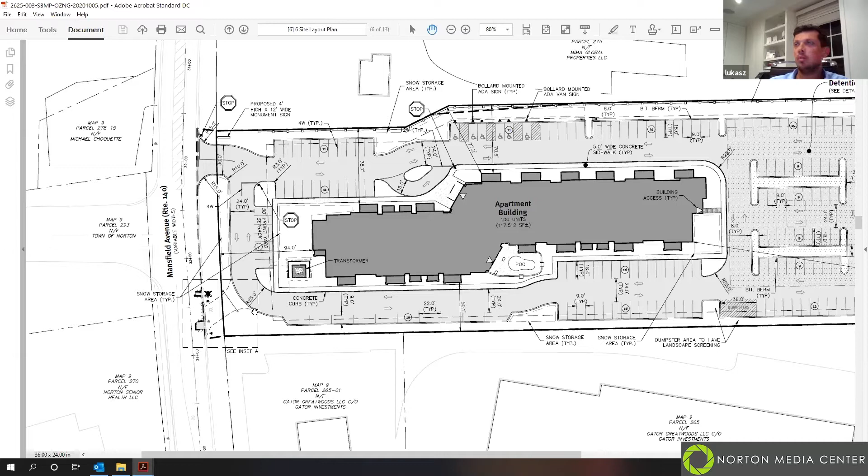That's why we started talking about the sidewalk, because we all came to the agreement that someone from here is going to go into the shopping complex, and to have them walk on the side of a road that has no sidewalk. Yeah, so the sidewalk's across the street right now.

It's even shown on Google Maps. That sidewalk goes across the entire property of the senior center, essentially, but then it randomly stops right in front of Great Woods, somewhere across from McDonald's.

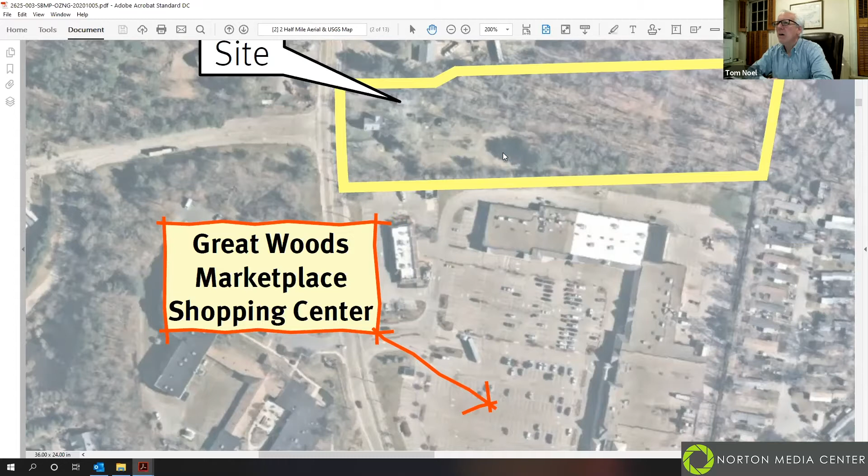From a common sense perspective, if Mass DOT got involved at any level, they would probably want to continue the sidewalk on that one side of the street and not have people jumping across the street. It's in our interest to request what we think is appropriate. I note the other apartments just to the north of the oil delivery company, too, and those people will use the street to get to Great Woods Marketplace.

So I think I understand what you're saying - that may be a reason DOT says hold on, let's plan this. I'm not saying no to the sidewalk. What I'm saying is, if we go down this path, which isn't a bad idea, there is a sidewalk across the street, so we should consider possibly a crosswalk so people can cross the street if they need to.

Yeah, I'm not disagreeing. That's exclusively DOT's call though, isn't it? Correct, yeah, that's a DOT street, so we'd have to discuss it with them.

They'll probably look at factors including the amount of traffic, because this is what they call a mid-block crossing. So they're going to look at a number of variables before they'd approve a crosswalk. They might look at several things - they could look at the main entryway at Great Woods and have a crosswalk there potentially.

We would love, as a town, to see a red light there. We don't have one. I do want to point out, to answer the question that was raised, there are no plans - this would fall under the state's transportation improvement program. We don't have any plans for this area to have sidewalks. So the significance is, even if we worked on it today, we'd be looking at 5-6 years out at best to get something in this area.

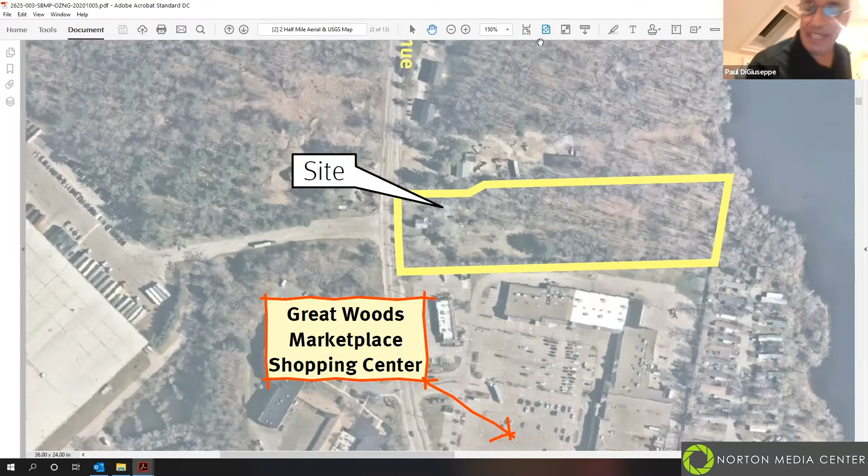Is it a crosswalk to the point of their property, or to the sidewalk? That's always a challenge, but I'm not sure what people in their project would be crossing for. You could make the connection between their project and the shopping center. But what's across the street that they would be crossing for?

That's a trickier one. But I'm saying the responsibility isn't up to the applicant to lobby the state for a crosswalk there. Right, no, that's our responsibility.

I think it's a good idea, but I don't know where it would be best located. The challenge again is you're putting people across the street where there's largely no sidewalks to begin with. So I think we stick to what we said - sidewalk in front of the applicant's property, except for the entrances, which has to be engineered, and not condition the permit itself on Department of Transportation approval.

But it's good that the applicant is agreeing to go forward and try to plan that out, include that. Does anybody else have anything on the sidewalk issue?

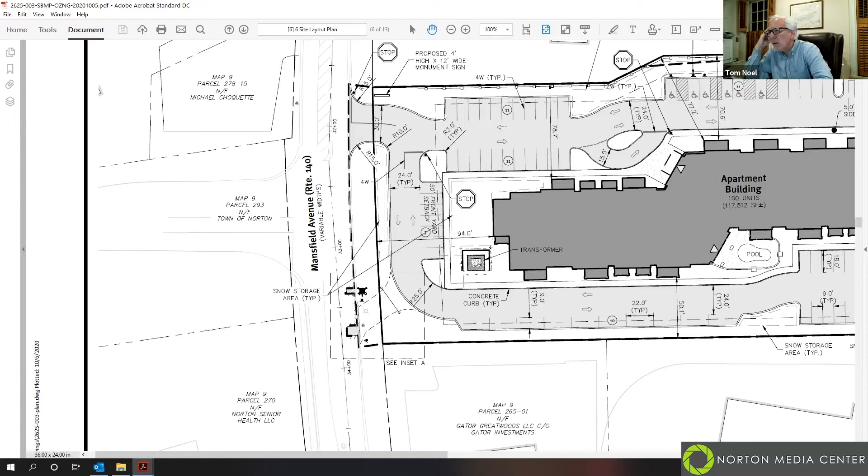Okay, so I had another question on this plan sheet. There was a note about vertical monuments on the north boundary. Am I reading that to say that some of the old property markers are on this side of the fence, for lack of a better way to put it?

Yeah, I think the peer reviewer brought this up, and we had actually noticed it when we did our survey. We went back out another time to redo this side, but you can see the monumentation on this northern property line.

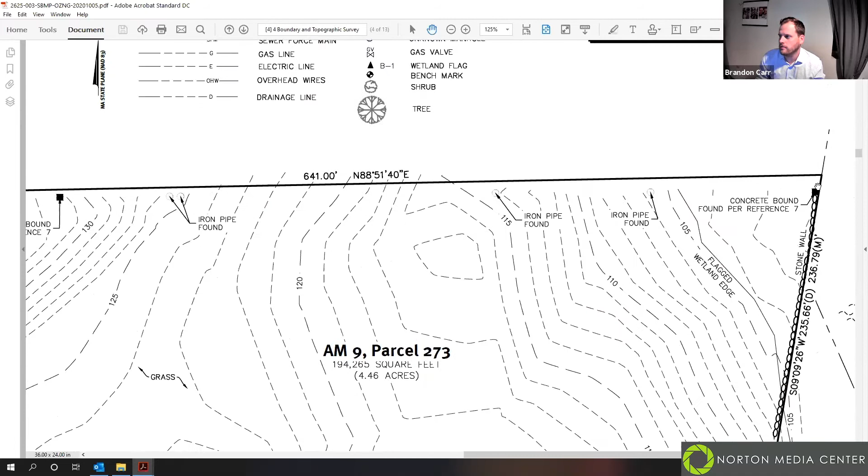We assume this wasn't correctly installed, and it looks like there were maybe a couple different versions of it. We ran the boundary from plans of record and retraced all the surveys we had, and it seemed like the monumentation on this side was just inaccurate. I had the same conversation with our surveyor when they finished the property boundary survey, and we went out and rechecked it.

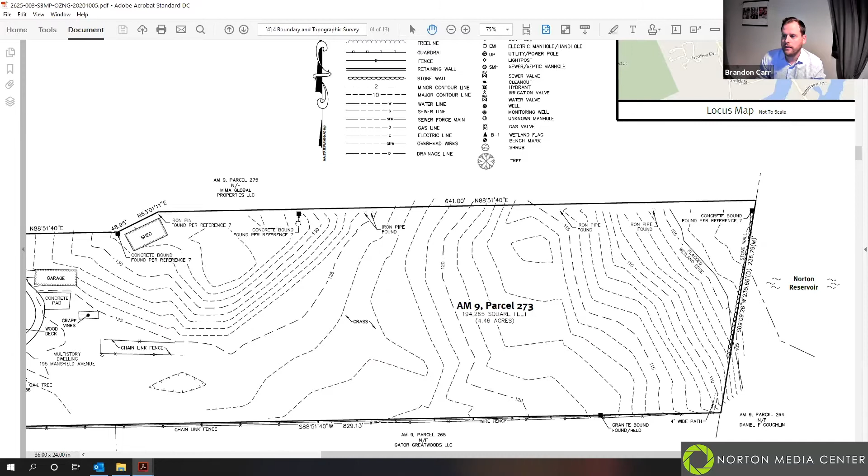So is there a marker there now so the neighbor to the north can see where you're claiming? Does the neighbor agree with your assessment? I don't know if we've had that discussion with them. It's off a couple feet, I think, in the rear here. Looking at the scale, it's probably off maybe 4 feet in the back, and closer to maybe a foot up here.

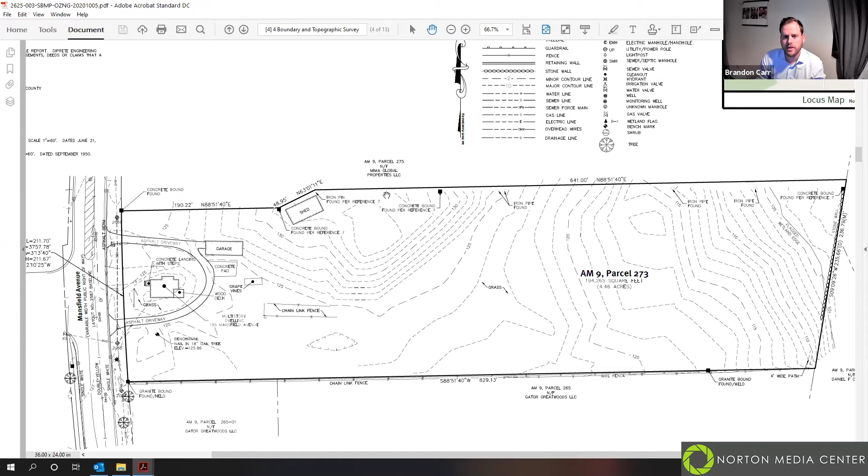So I'm just asking, is there a fence there or a ribbon now or anything? There is a fence there, and I think it's on the boundary, because I believe all this monumentation is on our side of the fence.

Well, I'm just curious as to whether the neighbor says anything different. It's not really our concern. I mean, you have to have control of the site you're presenting to us, so I'll assume that you do. I'm just curious whether he agrees. Yeah, it's an interesting little piece of the project for sure.

Were there other questions on this plan sheet specifically? There were some issues about the turning circle to the north on the north side. There's a little island there, and one question was whether you should get rid of the island. But the answer was that you're trying to make it an alternate drop-off or move-in site, which seems to make sense.

I saw that, unless our consultant or any of the members have questions on that. The other feature was the fire department got back to us, I think last Wednesday by email, saying they were fine with the revised plans. There's also a plan in the packet showing the largest apparatus we own and how it would be positioned going into and out of the site, just showing visually that it can be done. The fire department said they were okay with this? Correct, yeah. We got the exact specifications of their largest truck and entered it into our program.

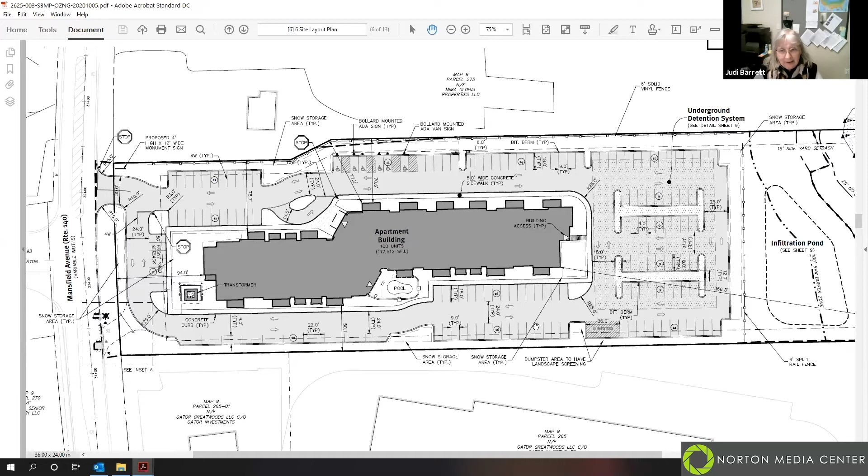I have to speak up, I agree with Paul. I do a lot of work with 40B, a lot of work with boards of appeal all over Eastern Massachusetts, and this is a higher ratio than I've seen in any other projects I'm working on, not even in transit areas, just suburbs. It's high. I think Paul is asking a legitimate question. If anybody's providing 2 spaces per unit for multifamily housing, shame on them. I'm not saying, it's nuts, sorry. Which is a good assessment of our zoning bylaw in a microcosm. But this is 1.58, right? Yeah, 1.58.

Well, my only commentary, if I may, Mr. Chairman, Peter Freeman speaking, is simply that AR does have a lot of experience, and to the points being made by Paul and Judy, at some point, when the developer has the vast experience that this particular developer does, and albeit there is Great Woods next door, it's still a site where you don't want to lower it like you could in a city or a suburb like Brookline, a very poster child near the subway and near lots of bus lines and things like that.

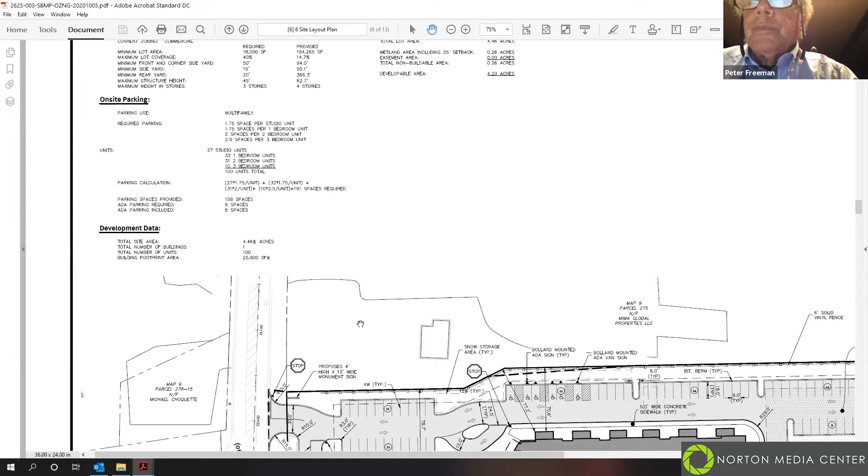So my point is not that your point is not sometimes well taken on a specific site, but here, with the experience of the developer, I'm uncomfortable having a requirement that doesn't jibe with their direct experience. Just to be clear, Peter, I'm not talking about Brookline. I know you're talking about other suburban sites, but I also handle many 40Bs, and my experience is not the same as yours with my clients. It's much more in keeping with the range that Brandon just described.

Judy, do you have a suggested ratio for a town like Norton and a spot like this? In the past, we've always been concerned that not enough parking was provided for projects like this, and we've said we don't want people wandering off site to leave their cars for a day or two. But what ratio do you recommend, Judy?

Given the location, the proximity to goods and services next door, I would probably say 1.4 maybe is what I'm used to. 1.3 to 1.4 is kind of what I'm used to seeing.

Wow, I'm surprised. I'm not, and I'm not designing their project, so I don't want to be difficult. I respect the fact that the applicant developed housing, but I am seeing these ratios come down everywhere. This is a big concern to planners - the amount of parking that we're building that ends up sitting vacant and simply creates environmental problems that are avoidable if we just didn't build so much parking.

Yeah, and Chair, just to add to Judy, typically the problem is not underparked for new projects in the last 30 years - they're most frequently overparked. They try to balance, like if it's a retail project, they'll try to balance that peak time, like day after Thanksgiving. But then you see the shopping malls around other times and they're half full, right? So that's typical of residential as well.

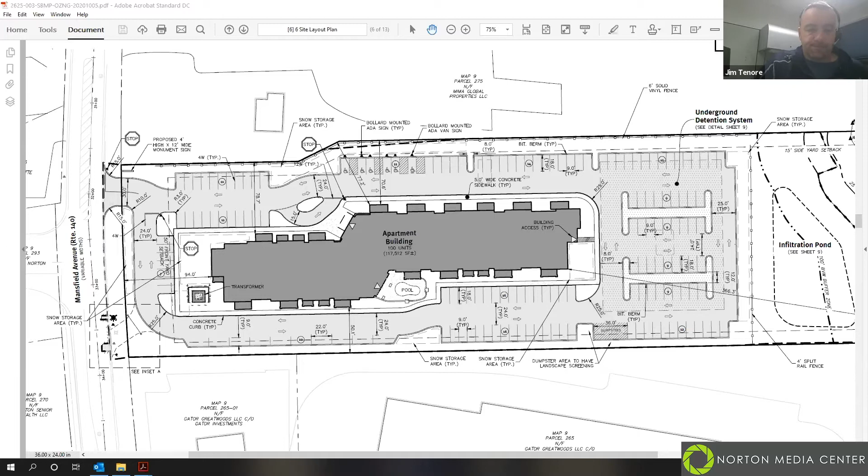But, just eyeballing this, if we were to take 18 spaces, I'm looking at the easterly end, by the infiltration pond. You could take 3 spaces, 3 spaces, 3 spaces - 1, 2, 3, 4, 5, 6 right there. You'd shave off 3 spaces off the right of all of those rows, or the 2 spaces in the outer rows, and then some combination.

So it is a savings potentially of, I don't know how much area that is impervious surface. If you want to do it, request it, or if not 18, 15 or 14.

It's up to us. What about the possibility of not building all of the parking right away? I've seen that on a lot of projects where there's this concept of reserve parking. So if you don't need it, you don't build it. If you need it, after a year, if it looks like the demand is such, then you could build the spaces you didn't build right away. Isn't that what we're talking about, or is that different?

Yeah, I was just going to add, Jason Kambitsis with AR Building, he keeps popping in and off. He was texting me, he's having some connectivity issues. So that's what we were just talking about. He just wanted to say that from their standpoint, they're not looking to build a lot of parking. It costs them more money to build, it costs them more money to maintain it.

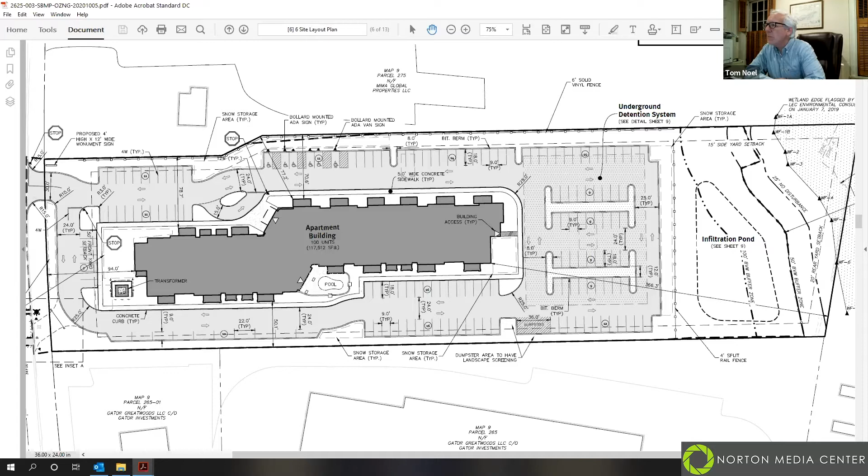Okay, Pat Brennan, do you have any view on this, contrary to leaving it as is, except demarcating certain spaces, shall be left as lawn or green space, but shall be allowed at the option of the builder? I don't know how we would word that, but I'm sure we can find out with Peter and town counsel's help.

Yeah, and I think when Brandon was pointing it out, I think the optimal spaces to leave are those 18 in the middle, because then you eliminate that access drive between there too. So it's actually a nice green area for people to use if it isn't needed as parking. Exactly, it would be nice, attractive, sure.

That condition is not hard to write, Tom, because there's actually a lot of bylaws I've worked with over time that provide for reserve parking. So there's some language we can craft around that.

Okay, well thank you. Then let's, can we move forward on that basis? Take 18, unless there's a reason not to do the middle 18 there that we're all looking at. I think this makes the most sense, these 18 right here, because exactly like Pat was saying, get rid of that. On the next plan revision, just show it, and on the detail or on the key, say that these spaces shall be kept green at the initial stage or something like that. Just make it work, and great.

We can—if you put it on the plan, that'll be like a reserve parking. Exactly. But then does the applicant owner then later have to come back to notify us?

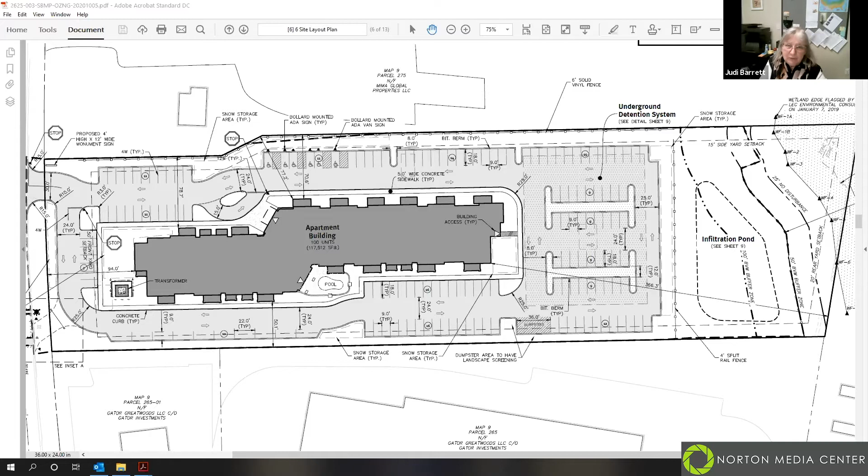No, because the way we would write the condition—I defer to you on this, Paul—but the way I've typically written this, it's reserved parking, and within a year, if the demand for the spaces actually exists, then the building inspector can authorize the construction of the parking. But you've basically already approved it because you've approved the plan, you're just marking that area as not to be built within the first 12 months or so. And Chris Carmichael is always going to be involved whenever there's a change.

So Yeah, right, okay, that sounds good. If everybody's okay with that, let's move forward on that. Thank you. You're welcome. Where do we go next, Peter?

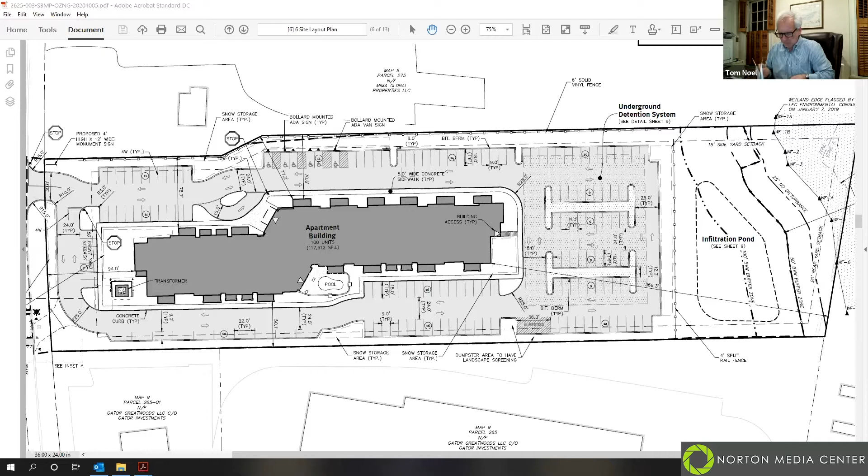With either detail by detail or a specific plan sheet, what are you comfortable with? The only other thing, deferring to Brandon, but I think we also submitted the more precise left turn lane that had been discussed, which is also something we would accept as a condition. But as with the other business, it has to be subject to the approval of MassDOT.

In other words, it's not part of the plan set, is it? No, it was a separate standalone sheet, and I think Derek from Vanasse is here if he wants to go through this.

Yeah, sure. Hi. Yeah. Hi guys, this is Derek Roach, Vanasse and Associates.

We can do everything within the existing width of the road. We just restripe—we'll stripe in a left turn lane, about a 150-foot bay, and then we'll leave the little end of the median painted there. None of this stuff is raised; this is all painted on the pavement.

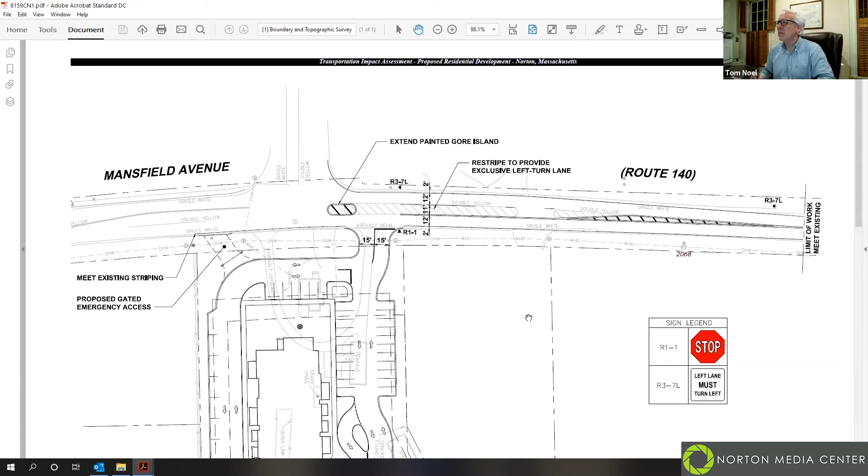And so that's pretty much it. We had just asked you to show us what it would be like and where it would be. So thank you. No problem. Any questions, Judy or members or Paul? I don't, no. And again, that's all DOT approval, right? Yes, correct.

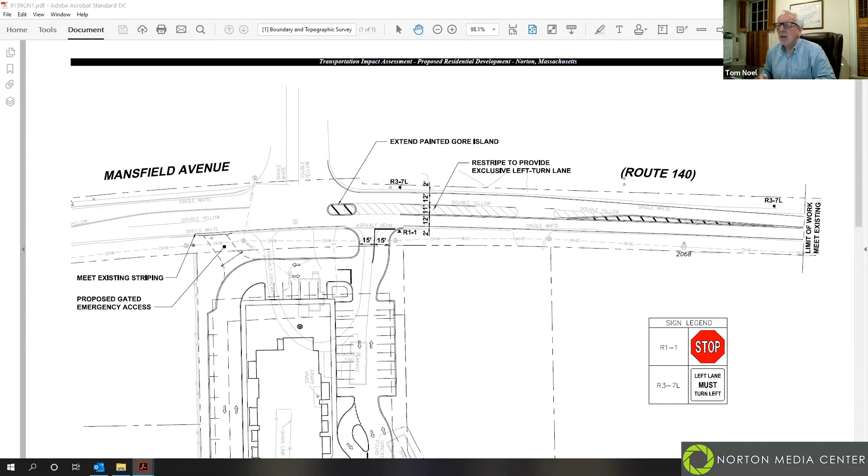One random note I had on the plan set—I think the fourth page was misnumbered. There it goes 1, 2, 3, 1, I think, instead of 4. Is that it? Yeah, sometimes with our survey plans, if they're done earlier, we plug them in and they were prepared as a 1 of 1, but we can fix that. Okay, I just wanted to note it—I didn't know if mine was messed up here that I printed out.

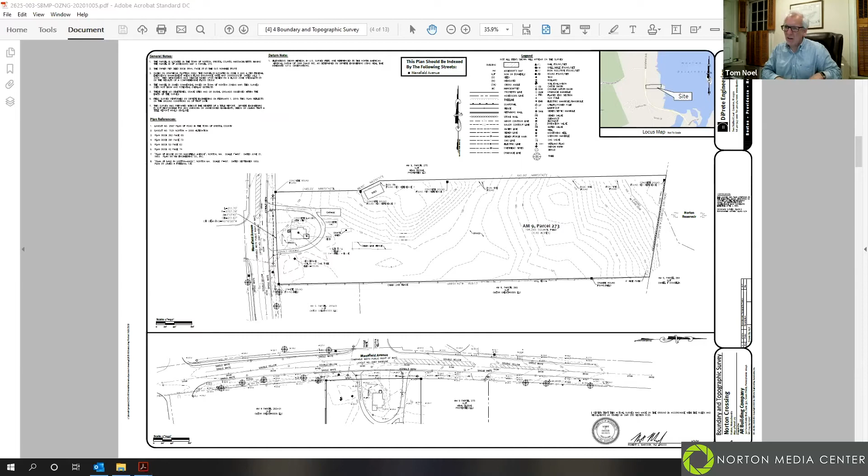Okay, there's also a photometric plan, which on my best printer doesn't show much at all—doesn't print out very well. Yeah, those don't always look great. Let me find it here and I'll put it up. Yep, it was a separate email again, I think. Right, it was. I could see it on the screen blown up, what you're doing, but it doesn't look like much on an 8.5 by 11.

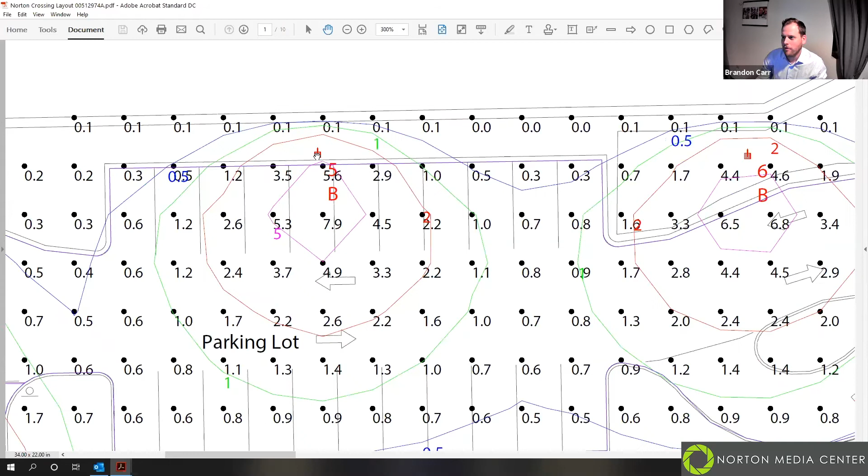There you go. So can you just tell us what we're seeing? Are the red blobs where overhead lights are going? Yes, so the circles are basically the light radiuses around the poles. The poles are tough to see, but if you really zoom in—the photometric professional field, I would say, is not great on graphical presentation, so it's tough to get a photometrics plan that looks beautiful.

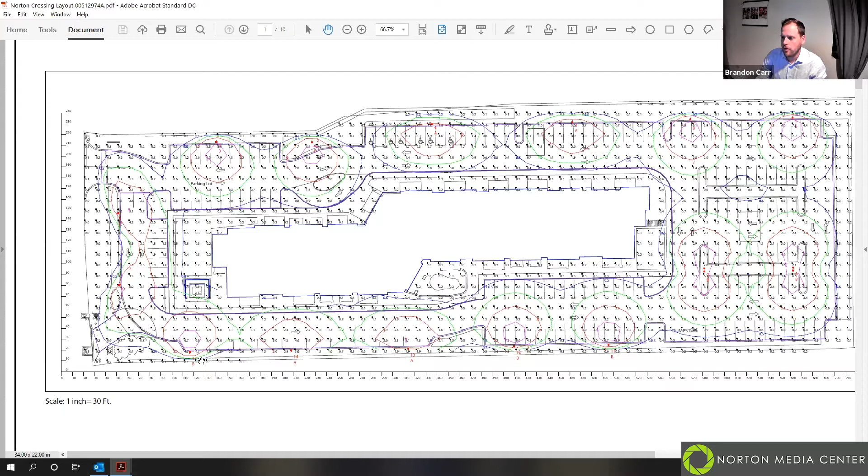So these are kind of the different intensities of light. The blue line signifies, I think, basically 0.5 foot candles, which is very, very low lighting. Usually the town regulation is 0 spillover or 0.1 spillover at the property lines. We show 0 spillover, other than in a couple spots—0.1 here, and at the entrances. Ours is 0.1. Yeah, so. Really? Yeah.

So all that you can see, there's kind of moving around the site clockwise. There's lights here, here, here along the perimeter of the development, and then a couple in the back parking area. These are double lights, these are all singles. They're all facing interior to the development, and they'll all be shielded from above and from behind.

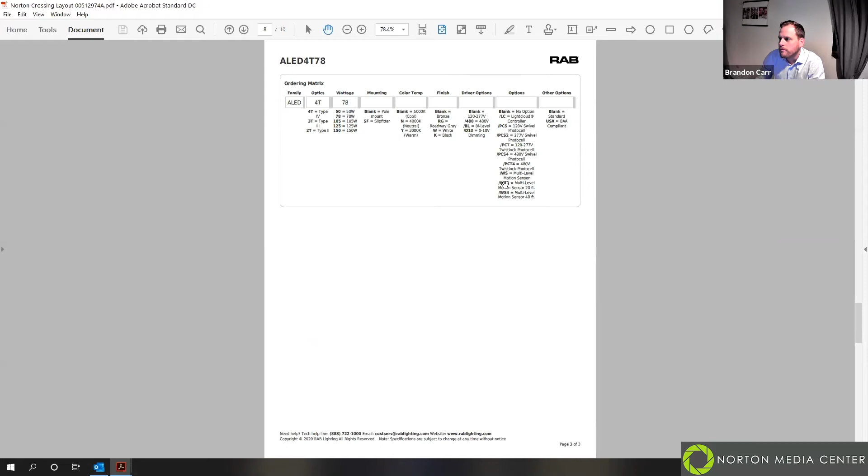I think there's some better views here. Sometimes they do a heat map kind of view, but that's kind of what you're looking at.

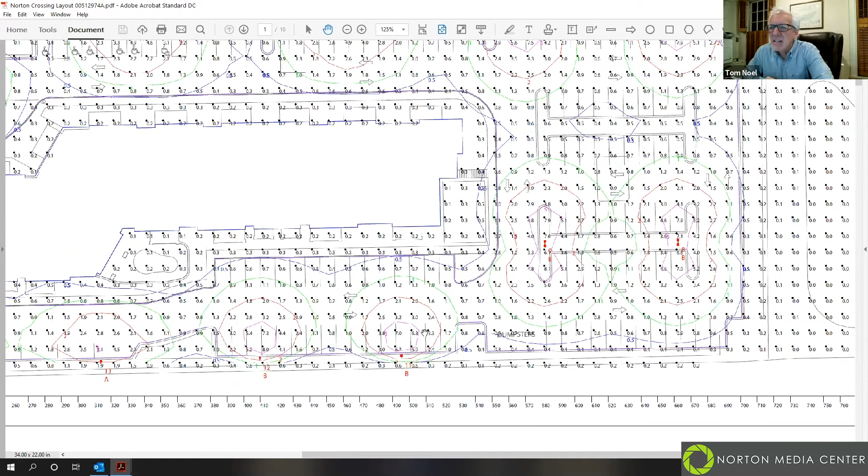Do you need a waiver for where it's 0.1 at the edge? I don't believe so. The 0.1 is the standard you don't want to exceed, so anything over 0.1 we really prefer it be reduced because of light impacts. Looking at it, we saw some 0.2s along the edge, but that still looked like it was within the property. I thought you were suggesting it exceeded at a couple points, but fine.

You could actually add screening to any of those lights and that would help with the diffraction. And on the northern property line, remind you too, we did propose a solid fence, so that would help out.

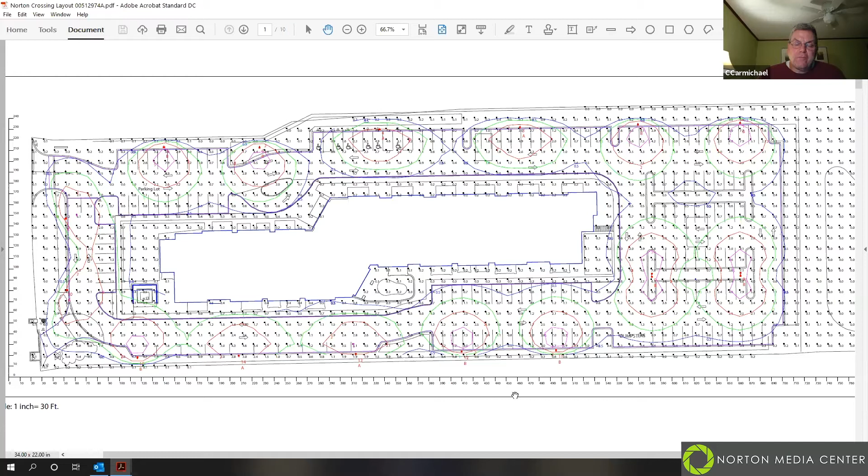That's not really modeled in here. The southern property line has an existing chain link fence. Obviously that's not going to block light, but it is a shopping center—their light probably spills over onto our site more than ours does onto theirs. These are both commercial properties to the north and to the south. It would only be to the east, where you have the mobile home park, that you might have an issue.

Like we were talking before, the 100-foot buffer—that's almost 200 feet to the property line back here where we have 0.1. And foot candle measurements, am I right—that's on the ground on a flat surface, how much light hits that spot? Is that it? Correct, yeah.

All right, thank you. Any questions on this, members? Judy? No, I'm fine. Mr. Chairman? Tom, I just had, I guess it was more of a curiosity question than anything.

In the back area where the islands are, why do we have lights in the middle of two islands, and why isn't it balanced, I guess? I can see two light poles in the back. I think two more here would have been a little overkill in the back, and that's the way they laid them out. We could maybe put one here and one here.

I think it's just that two lights—I mean these aren't big lights—I think adding two more here would kind of be overkill and really brighten up that area too much. Well, now that the center's going to be green space, you might want to look at whether you can slide or adjust those a little bit.

I guess I was just thinking, I know personally I would probably park under the lights, because it seemed unbalanced on the lighting. I would have parked close to the lights, and the other islands I wouldn't have parked under necessarily because it was darker. Well, if you have my car, you park in the dark. Yeah, but the same thing with that back corner on the Greatwood side—it would have been darker over there, so I'd assume you'd probably not park over there. Less likely.

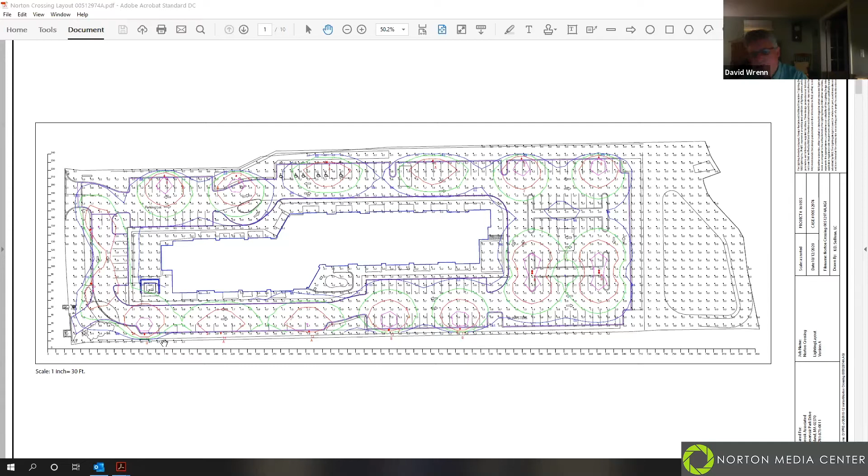I don't want to dwell on it, I just found it—I mean I don't know if this is enough light, again I don't know what the numbers mean. I'm assuming this would pass, that there's enough light there to park your car and walk safely.

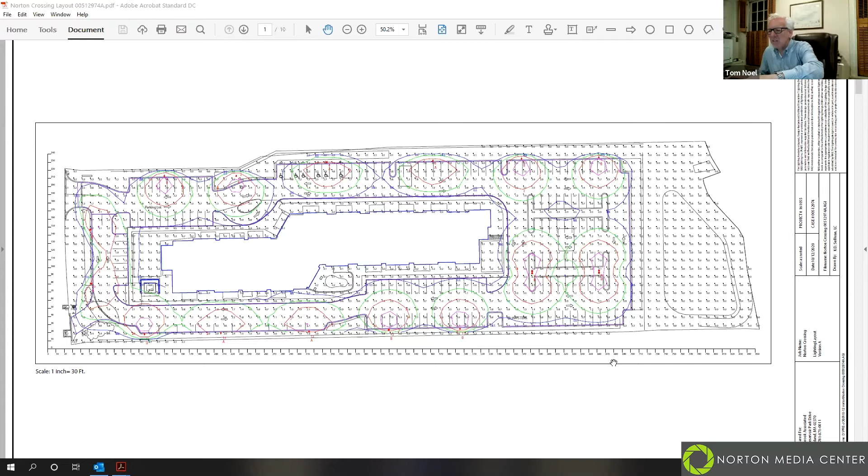This is basically when they do their lighting design—they look at the town regulations and industry standards for the different type of use. Since it is a residential use, you don't want it lit up like a shopping center or like walking around Gillette Stadium parking lots, because people are walking inside and going to bed. So it's more muted lighting, more downward-facing shielded lighting than a shopping center, especially some of the older shopping centers. You can see the light structure in that plan set you were just going through—it's kind of a flat top overhang.

Yeah, it's an LED structure. This is all screened on the top, so it's really broadcasting the light pretty much straight down. I'm assuming this will be appropriate. Yeah, this is a pretty standard light style that we see on these types of developments.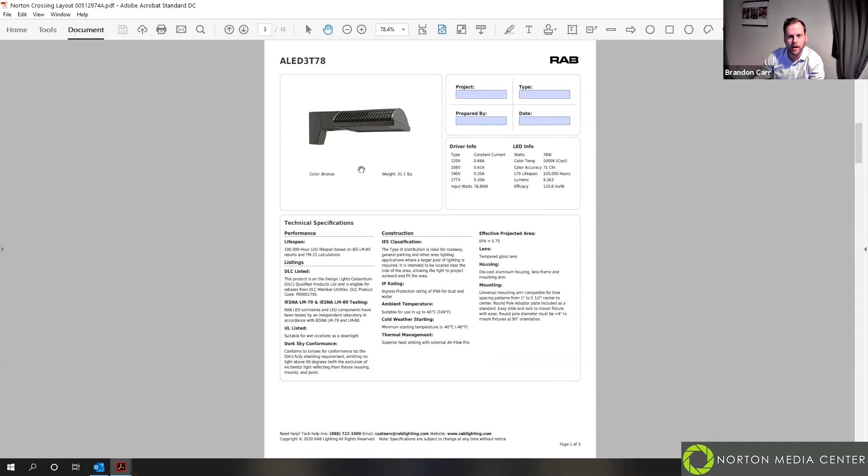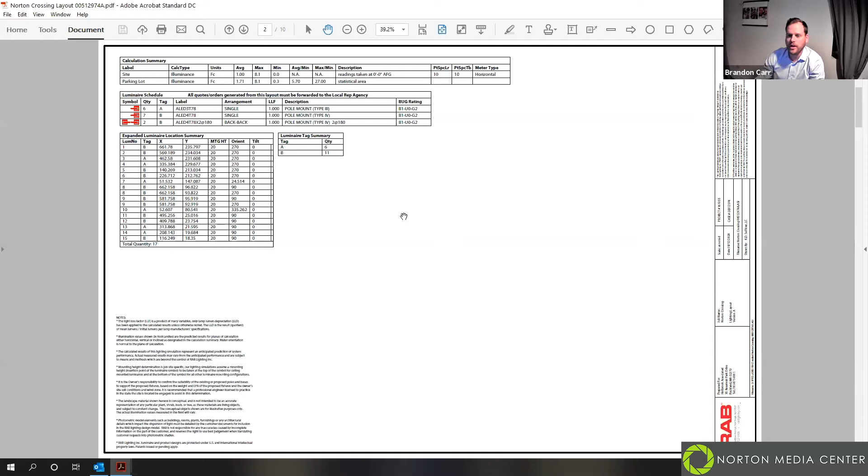Light pollution is the real concern with most developments. You don't want light spreading out, right? That's what Paul was alluding to. Correct. You see that a lot in the older retail plazas where they just have big bulbs broadcasting light everywhere. The older fixtures are much less aimable than these new LEDs. They can really dial in where they're trying to put the light, and they can be adjusted. The brightness can be adjusted, so if areas are too bright or too dark once they're actually in the field, you can dial them down, or adjust the timing. They're very easy to modify.

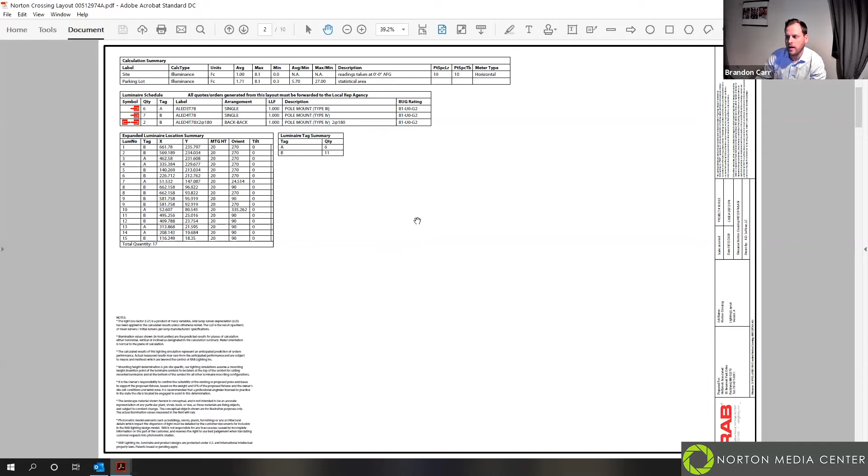Okay, thank you. No other questions or issues with this? I'll put that in the pile over there.

I'm sorry, the pre-engineering O&M plan — I printed out a couple of sheets that I thought we'd be going through. If it's something we don't have to look at specifically, just say so.

Yeah, that's a pretty standard document. It's just the long-term operation and maintenance plan for the stormwater system. It details the different structures and when they have to be inspected, maintained, and cleaned. There's a whole inspection plan, a multi-page inspection plan here.

Correct. So is this new to us, or was this in our packet in August and July? I'm just asking to the extent our Mr. Brennan, his firm, and Judy need to go over this. I know it was a big issue in past projects because we don't want something put in there and then have it unmaintained and falling apart, giving the town problems later.

So is this new in the last week? It's dated the 5th or something. No, it was included in the original submission. A revised copy was submitted to address some of the comments we received. Yeah, it was revised to address a couple of comments I had in my original review letter, and they did address those comments. So that newer plan satisfies the concerns I had originally. We don't need to go back to the original comments unless anybody wants to raise those. This is satisfactory to you though, Pat Brennan? That's correct. Okay.

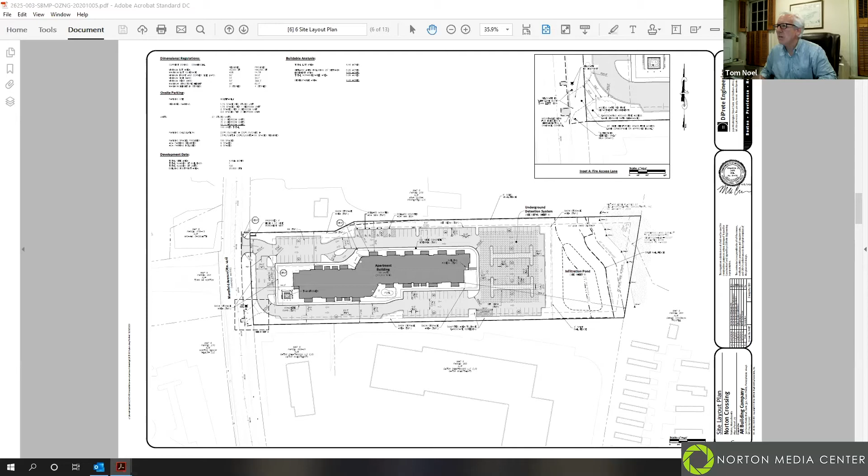So there are systems to actually keep the water moving, right? Is that what I was seeing? Correct. The main system, to detail it: the parking lot is captured in a typical catch basin, conveyed by pipe to that system in the back. The downstream defender removes different suspended solids and oils from the water — it treats for water quality. Then there's an infiltration basin in the back that handles the smaller storms, infiltrating it back into the ground, and there's a larger underground detention system under the back parking area that, on higher storm events, contains that water and slowly meters it out to match pre-development flows.

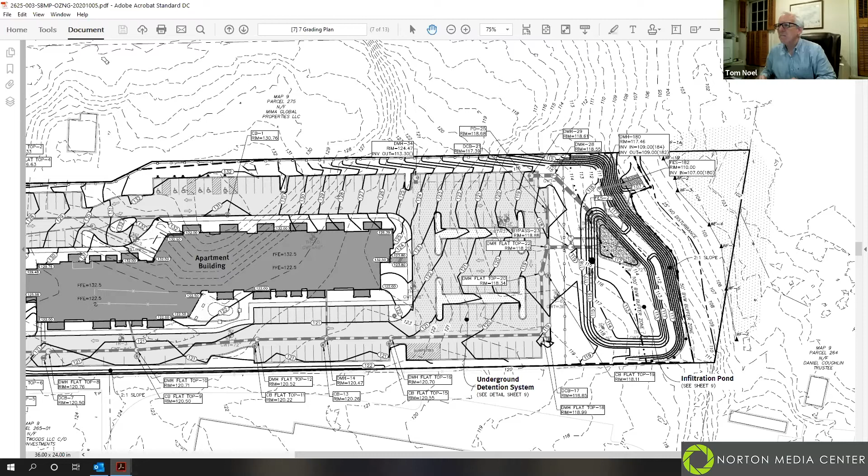And I saw the detail of capping the end of any pipes with cages so that no kids can crawl in there. Correct, yep — that must be standard. Yes. Okay, Pat, you already stated you were satisfied with this. Yes, basically the revised plans did address the comments I had from my previous letter, which we reviewed at the last meeting we had in September.

My only remaining concern, which we just went over, was about the photometrics. It's just when they build it — there were a couple of 0.2s and 0.3s up near the handicap spaces on the north side, but those would likely be mitigated by that six-foot high vinyl fence. I just wanted to point that out.

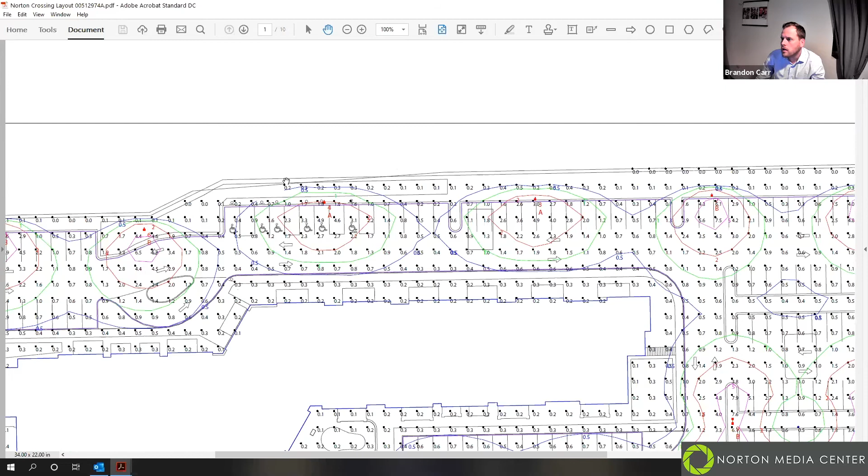Okay, is there any dispute there, Brandon? No, let me bring that plan up again. It's really, right there, yeah, it's in this area here.

It's this light, and we could look at toning that light down. But, like Pat just said, along this property line there is that 6-foot fence. That's not really part of this analysis. I don't know if they can model a fence or a barrier in this program, but it would likely eliminate that issue, we would assume.

And like it was mentioned before, if there is an issue, that fixture should be able to be adjusted fairly easily after it's installed.

That is a commercial property to the north, so if it's an issue, it's less of a concern than a residential property, but we can always make modifications if something is brought to our attention.

Okay, again, I was just asking to see if there are any waivers needed, because Paul had mentioned the point. So I trust you'll look at that. Okay.

What I found helpful was the letter from Mr. Carr dated October 6th. It went through a number of the items that had been raised, and we've touched on some of them before, already tonight.

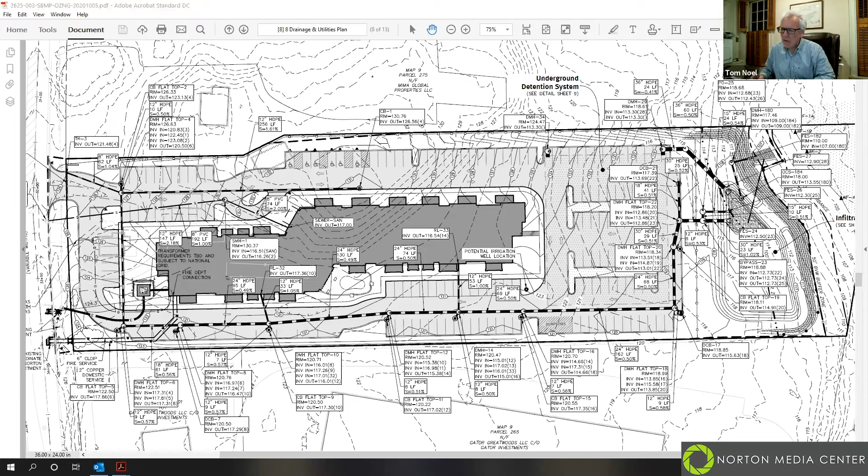But if you want to turn to that, I had just highlighted a few things I may want to ask about. It's the DiPrete Engineering October 6th letter signed by Mr. Carr. Yep, I've got it right here.

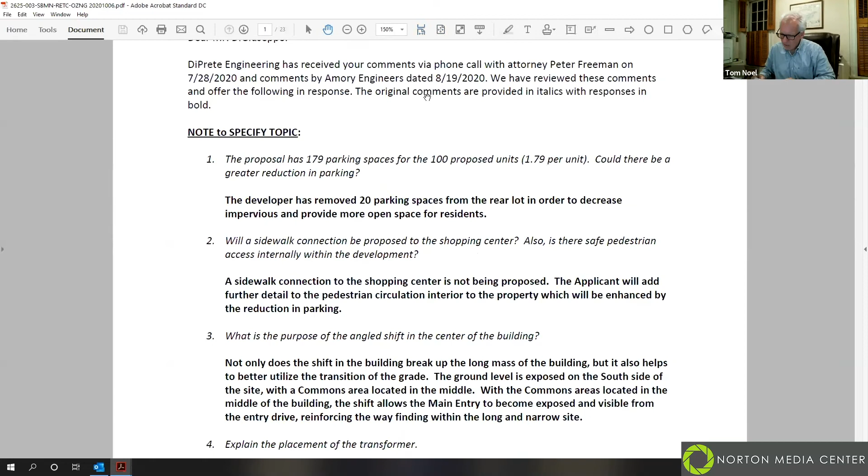Great. The sidewalk, the parking sidewalk we've discussed. Angled shift, I think we discussed that last time, or maybe not. Someone stop me if you want to ask or talk about these.

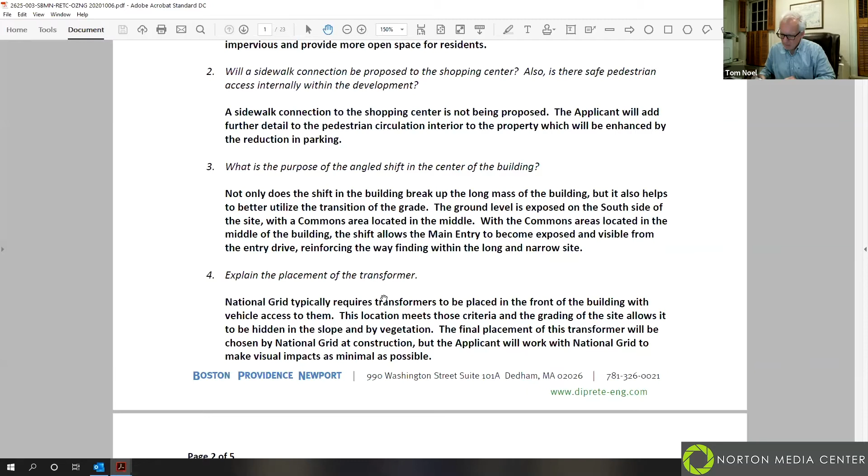The placement of the transformer, we had talked about that a bit before, but National Grid actually makes that decision later. That's interesting. Yeah, we have a plan and a suggestion. They can overrule us and put it where there's better access for that, but we try to plan a spot that would work for them.

Circular drive is what we talked about. Access points to the building we talked about.

The landscape buffers, those dealt with adequately. Pat Brennan, I'm asking if you have any responses to this response letter from just last week. Do you have it in front of you, Pat? I don't want to... Yeah, I have the letter in front of me.

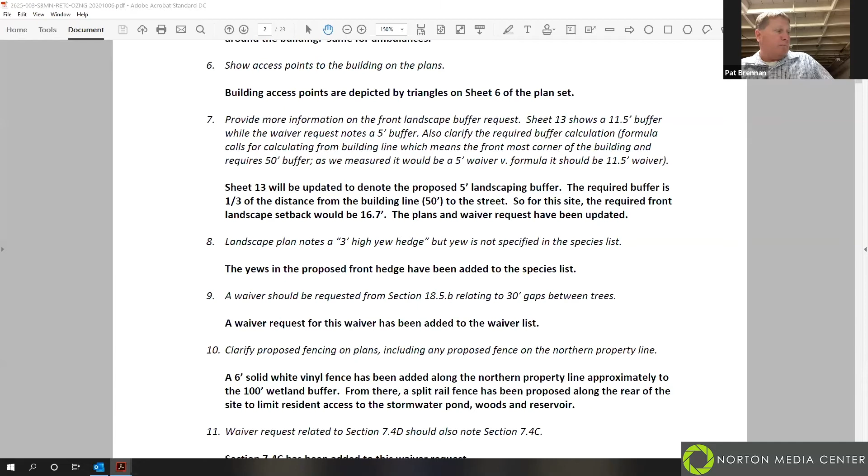Okay, so you see what I'm asking about. I'm just on number 7, 8, and 9, talking about landscaping and buffers. Have they addressed our concerns as you had expressed? These were actually Paul's, but yeah, these were mine, but they do. Okay, thank you.

Sorry, I thought this was from Pat's August letter. That's further down in this letter. Got it. The fencing is discussed.

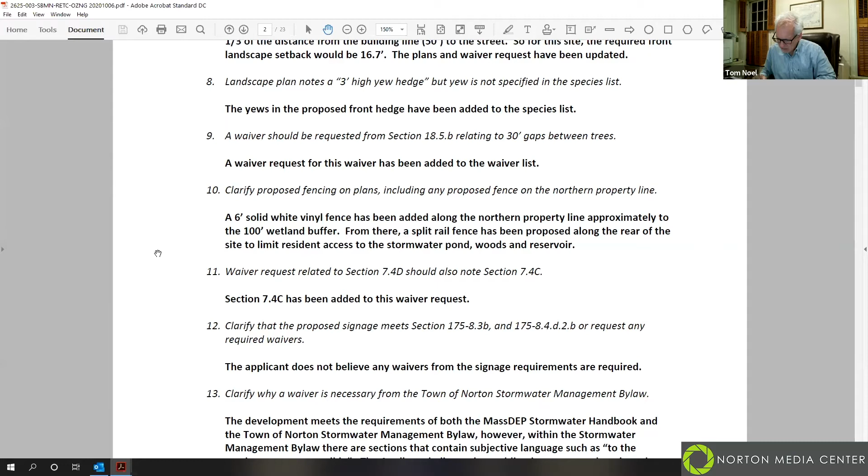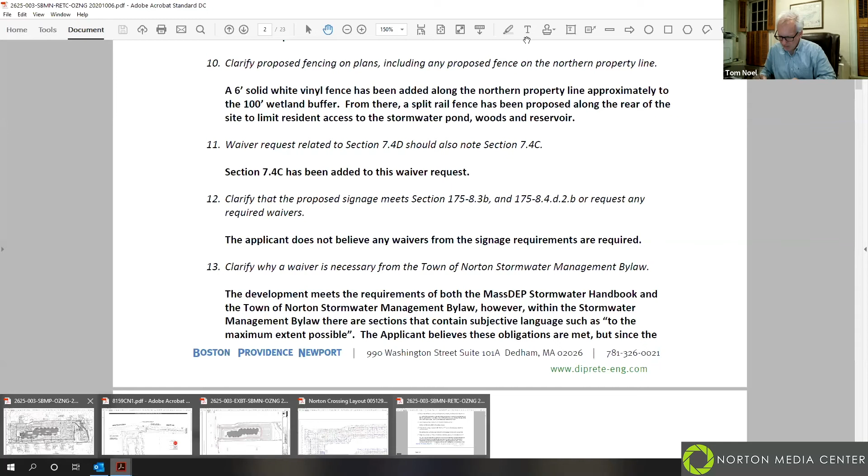Okay, the signage you think complies, so no waivers? Correct, signage. There's a drawing of the signs in these plans as well. Members can look at and satisfy themselves as to what it will look like.

Stormwater management bylaw, which is number 13. Do we grant that, what you're asking for, or is that something we should ask conservation specifically?

I think Brennan can answer, but we did discuss that either at the last hearing or previous to that, or both. It's basically out of caution. Normally, if it weren't a 40B, yes, it would actually be the conservation agent, I believe, who would report to the Conservation Commission, but I think administratively, the agent would do it. But the problem is it's kind of vague.

And so it talks about the low impact design to the maximum extent possible. So rather than leave that to some subjective judgment, we're just saying you've seen all the details of what it is. Your peer reviewer has looked at it and Paul DiGiuseppe has looked at it, and no problems have been pointed out. So rather than be left in kind of a gray area, we think it's appropriate for the waiver to be granted. But is that us who grants the waiver, or is that conservation?

No, this is because it's a completely separate local bylaw. It's not under the wetlands protection, it's local. Okay.

It would be you folks, yes. Okay, and that's in your waivers already then? Yes, it was initially. Well, in any case, it is now. I think we had it initially. Yeah, I saw it at some point, if not in this, later on.

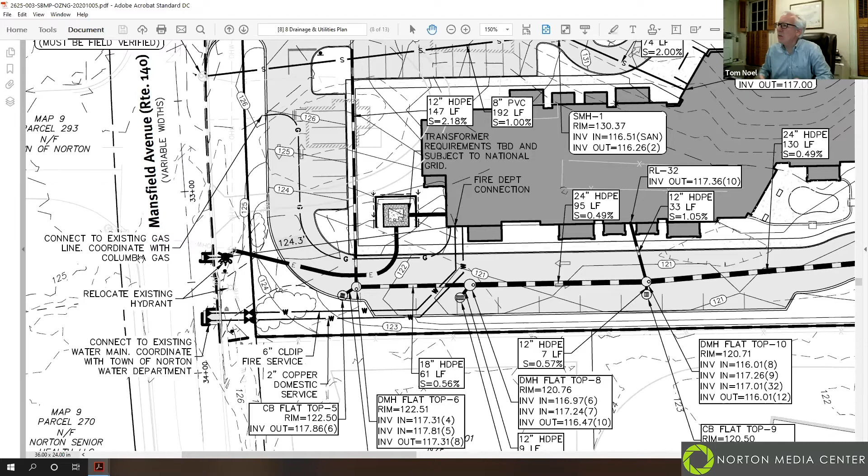But you don't need one in the back of the building too? No, they didn't request one, no. Okay. The building will be fully sprinkled, Mr. Chairman.

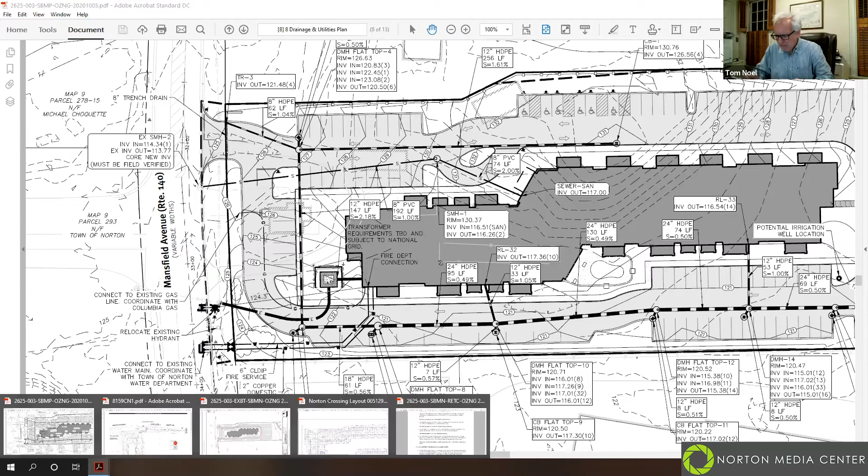Okay, the photometric plan set. Oh, the dumpster.

That chain link fence is going to have slats. What about the chain link fence? Let me try that again. Chain link fence along the south. Is that going to have slats in it, or do we need to address that? That's an existing fence. That's part of the shopping center. Okay, so that's what you're relying on there.

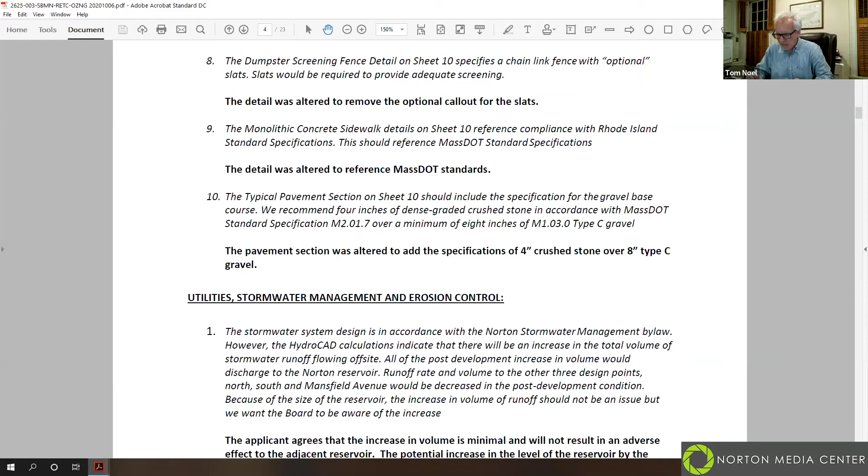Yeah, while we're on fencing, can we go back to number 10 on page 2 quick? Yeah, go, we're on the subject. Of course, yep. Proposed fencing on plans, including any proposed fence on the northern property line. Go ahead, what's your question?

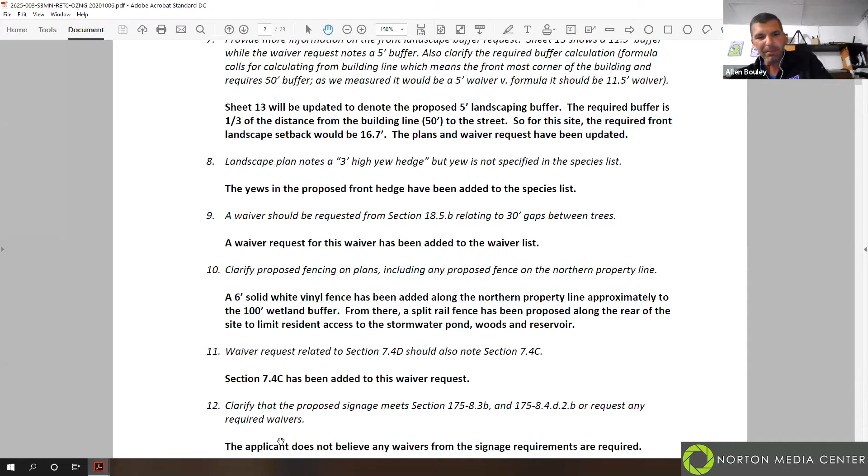So for a split rail fence being proposed around the stormwater ponds and woods and reservoir, since safety is something we're looking at, a split rail fence isn't going to prevent access or stop access to a stormwater pond. Just like you brought up, having to gate the ends of the pipes, the outlets of the pipes - how deep, I don't remember exactly how deep that stormwater pond is going to be, but I would assume if it was a safety hazard, they might have already addressed it.

Yeah, I mean, the way this at its deepest is around 5 feet deep, and that's not 5 feet of water. For the 100-year storm, I think there's 3 to 4 feet of water in it. And the sides are 3 to 1 slope, so that's a walkable slope in and out. It's pretty much, was it? We're still trying to restrict access to it, obviously. You don't want people playing in it. A split rail fence isn't gonna-

Yeah, I mean, it's more of a deterrent. And that was something that was actually discussed with the Conservation Commission, where we're close to the wetlands. For wildlife movement and things like that, they don't like physical barriers. That's why they had us stop the solid fence at the 100-foot buffer.

Yeah, we typically don't see ponds fenced anymore just because it becomes more of an eyesore and nuisance with collecting trash and things like that. Definitely don't disagree with that, but it's just one of those things, sometimes you'd typically see a chain link fence around to restrict access in some places, especially places that probably would have children playing nearby, possibly.

Back in the 80s and 90s, we used to put chain link fences around all of these basins. We stopped doing that because either chain link or stockade fences caused problems with kids getting into it and not being able to get out. So it was kind of a double-edged thing. That's why you really don't see fences around these basins anymore for the most part.

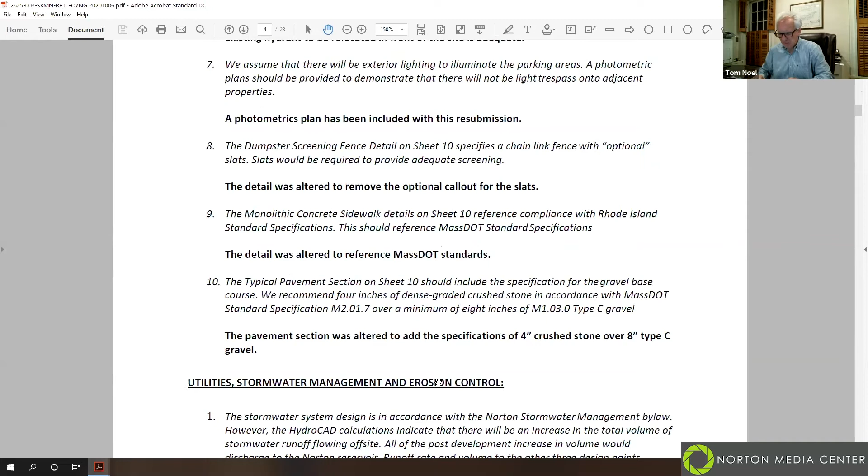So I'm back to page 4. I'm sorry, 4. We might have gone through all of these already. Yeah, I mean, I guess these were taken care of, but Pat, just chime in if there's something still to be addressed. No, they took care of them, and I apologize if you don't have my letter that I sent yesterday. Well, I might have it, but I didn't.

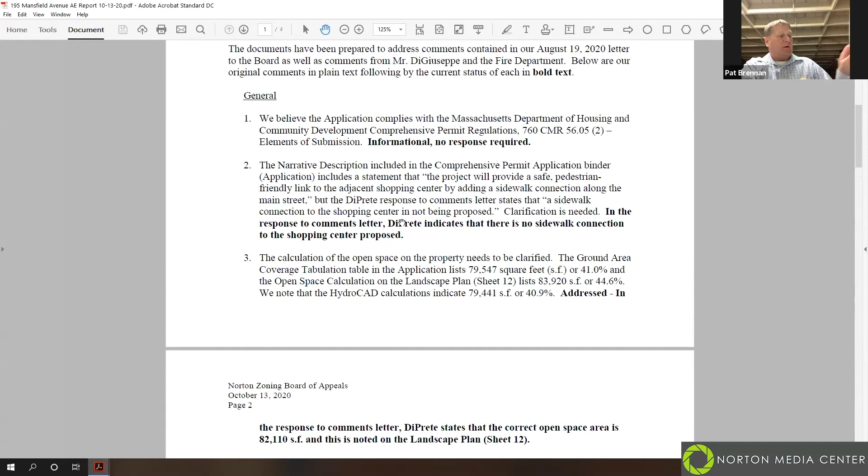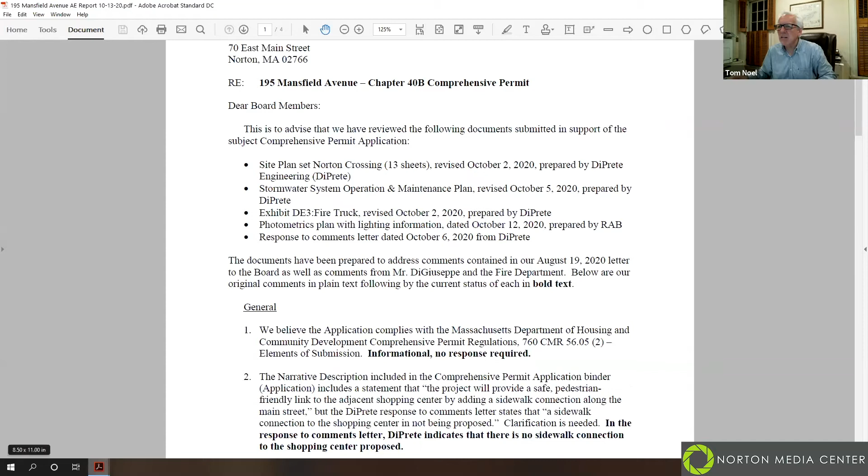No, I did state in that letter how they addressed each of my comments. So yeah, and here's Pat's letter if any of them you want to take a look at. His last responses are here in bold. Let me see the top so I see what it looks like. I don't know, I'll have to look for it in my packet, but that's fine. I mean, this is going over the same things we're going over now, I assume. Correct. Okay, so just let us know if you have anything in your letter, Pat, that we're not touching on that we should talk about. No, they've addressed my comments.

Okay. Then, I found, let's see here. That's the maintenance plan again. I found helpful both Paul's tally sheet of things we've been discussing, and also the requested waiver update. I suggest going through the waiver updates unless Peter or the applicant wants to direct us somewhere else next. No, I think that's fine unless Brandon or any other member of our team wants to add something else. But I agree, I was going to suggest the waiver update as well.

And I just have a couple of questions. Maybe we had this in a different form before, but this is the first time I paid attention to the detail in this. So Peter, you were saying you yellow highlighted things that are new this time. Correct. It's exactly the same format, mostly the same as the list of requested waivers that was in the application. I just yellow highlighted, including the date. I found it also helpful for myself as well as zoning boards that any revisions are dated. So this one is 10/10 at the top.

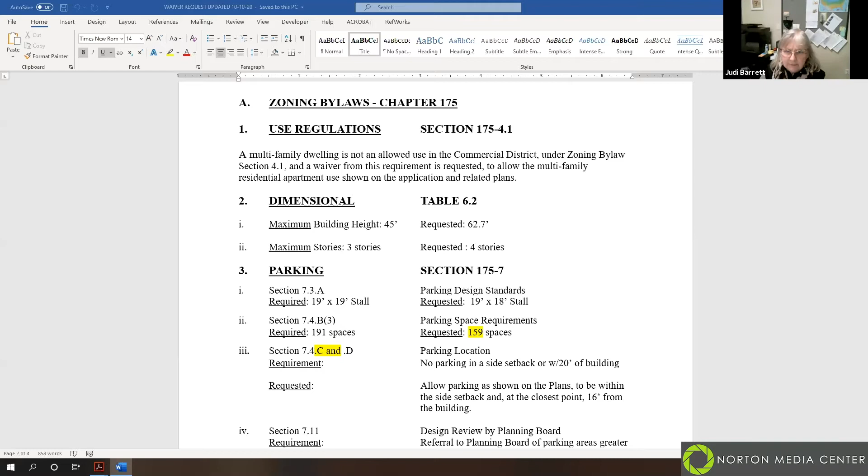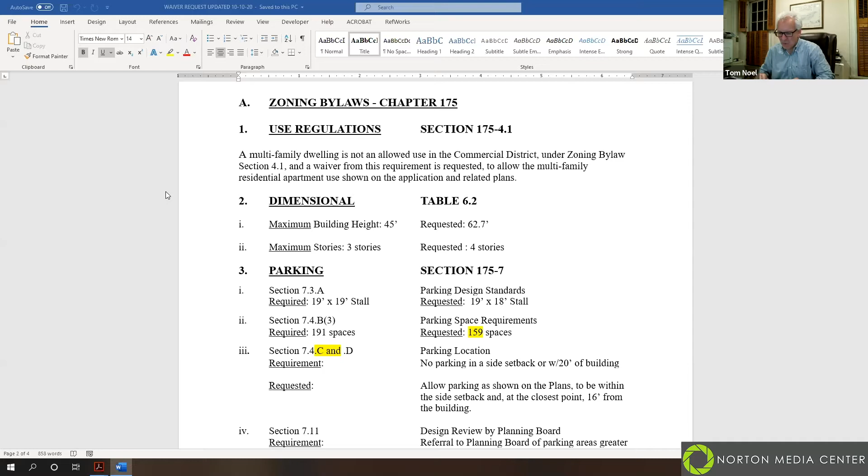But members, if you want to look at the list of waivers, on the second page, some of the requested waivers are on the right here. Some of them are below the requirements, but Peter underlined the requirement and then the requested waiver. Here's where the parking stall comes in. That's where I had seen it. A 19 by 19 stall is required, but they're looking for a 19 by 18 foot stall.

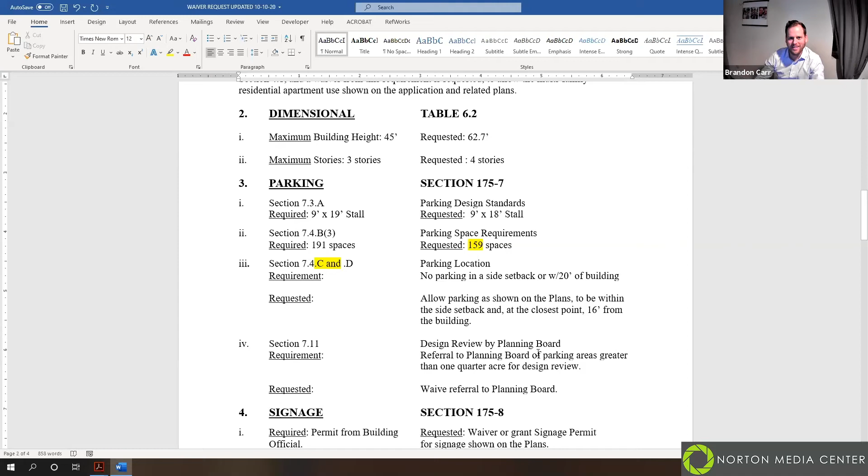And 18 was the length of the stall? I'll just jump in, I just realized we had a typo here. This shouldn't say 9 by 19 — 9 by 19 is required. I didn't catch that because we made the mistake initially. I was thinking we're going to have square parking spaces for our helicopters or something. That was going to be really weird. We're building less parking, but they're twice the size. I didn't pick up on that until this minute. Well, that's why we go over these.

So Peter, it's 9 by 18 instead of 9 by 19, right? Yeah, 9 by 18 standard. Okay, so really we have a larger requirement in Norton — 19 is required. That's oversized, Judy? Well, 9 by 18 is standard. I'll just leave it at that, I don't want to criticize your zoning even though I think it's excessive. The whole bylaw works that way sometimes, we're excessive too. Parking, we've gone over.

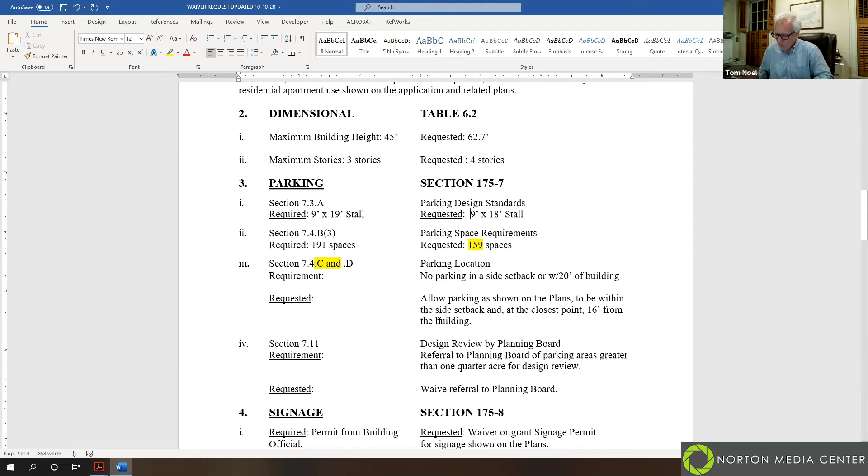Waive referral to planning board, that looks pretty standard.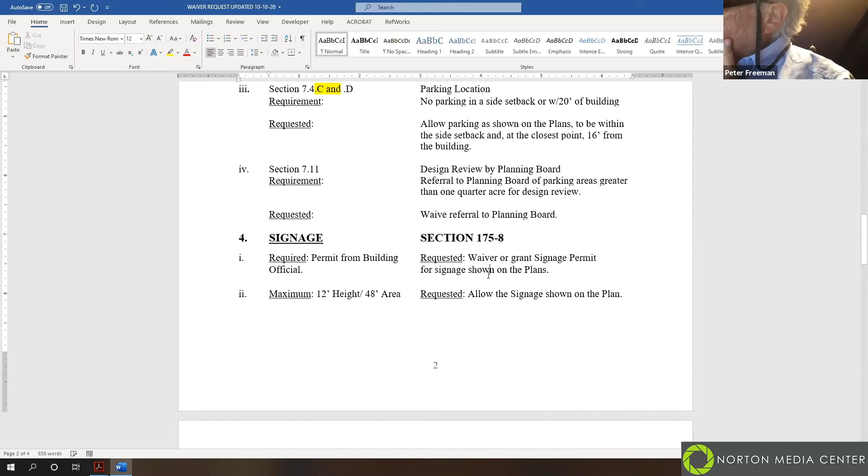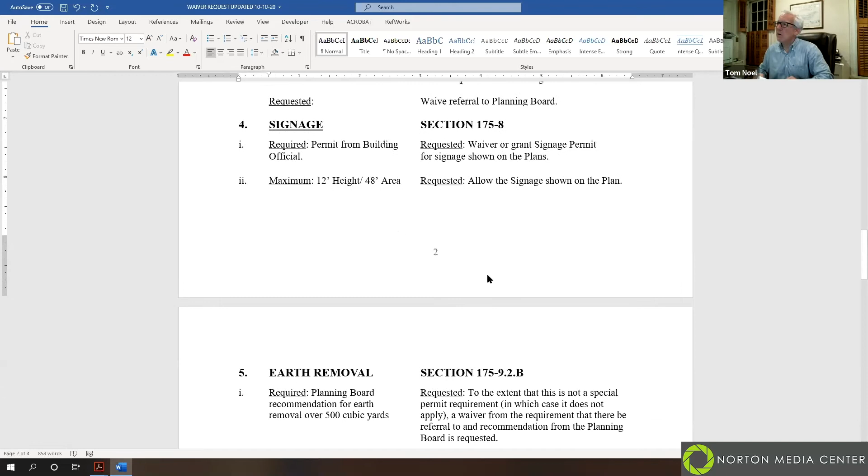I had a comment on the number 4, signage. I would like, we've always said to applicants, can you please be specific? Because this just says requested waiver or grant for signage as shown on the plans. We'd like the dimensions — if you need a waiver for a dimension... Judi, you're nodding your head. I completely agree, blanket waiver language makes me nuts. Because just waiving it doesn't tell us how much we're waiving or giving up. Peter, I'm sure you can work on that. Oh yeah, I certainly agree with those comments, other than I think the details are on the plan of the sign that we quickly looked at earlier, but that's fine, we can add them here. Makes sense, just put them in verbally, so we can see them in front of us.

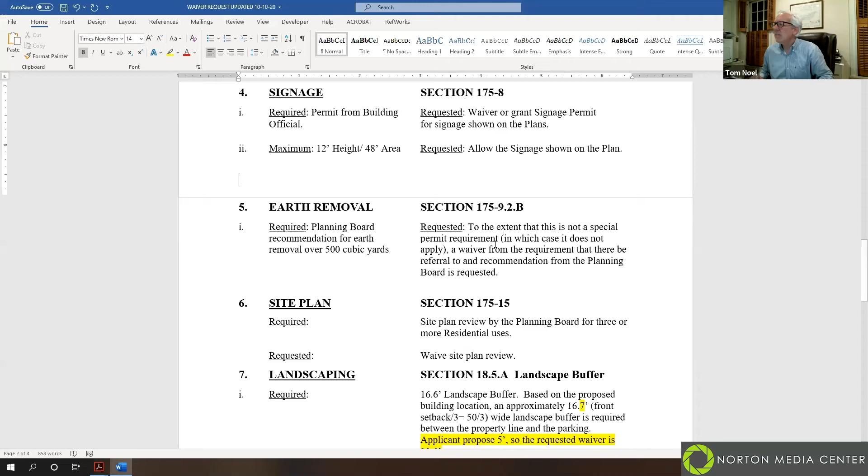Thank you, I think that's the only one I had a comment on for signage. I thought they were in compliance with the signage. Yeah, Brandon, earlier I think that's what the comments were. You're right again, Jim. So the maximum size is 48 square feet, and we're at 10 by — I guess even if you consider the base, 12 by 3 feet, so 36. So I don't think we need that waiver, Peter, actually. Okay, fine, great, we can get rid of this one right here. Great, both sections of the signage, 175-8.

Be careful because the bylaw may combine signs. Yeah, we can double check it, but I thought we had talked about the signage and they were clear — dimensionally, they're fine. We'll double check that, yeah.

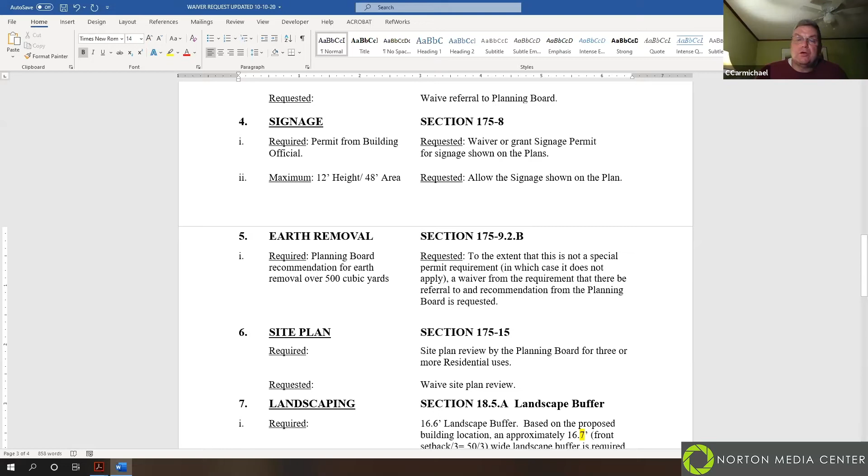Mr. Chairman, while you're talking about the signage — we usually request the address be placed on the sign. I don't know if that's on there, if they could go back to that for a second. Do you actually have the address on the sign? No, it doesn't look like it, we can add that. We'd like that — that's helpful for first responders and for deliveries and locating the property on the street as well. Yeah, we'd request the address on that sign.

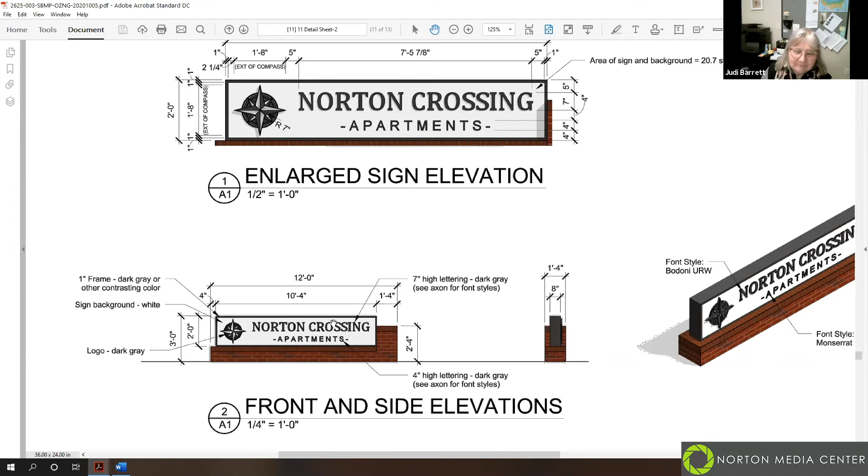I assume this is just an artist's initial rendering, so that's not going to be... Correct, yeah, we can definitely have that. Good point. And are these lighted, illuminated from a different structure, or are these internally illuminated?

Jeff, I think you gave me this. Yeah, I'm Jeff Campbell, the architect with AR Building. We typically don't illuminate these. They're typically just illuminated through the site lighting in general.

Chris, does that pass muster? Yes, it's required by law that you have the address number on the building. It's supposed to be on the building, but since it's set back from the road and we won't see it, we'd ask for it on the signage. But not illuminated specifically is okay? No, it doesn't need to be illuminated. It needs to be 4-inch high letters and a contrasting color to the background so we can read it. We can certainly work that in.

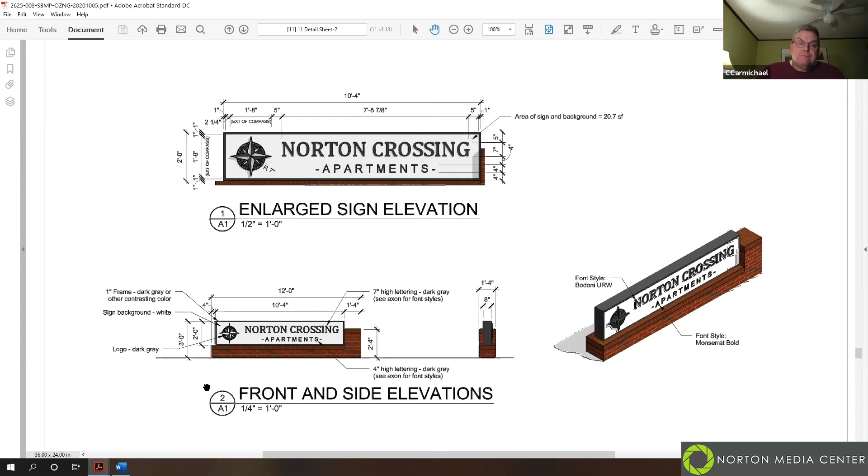And when we have time, I'd like to go back to the height requirement and discuss that, if this is the appropriate time. Sure, we can do that. That's number 2 on the waivers.

Go ahead, Chris. There was some confusion when this was originally presented, and I don't know that you quite understand there are two separate sides to this building - a 4-story side and a 5-story side. Stories above grade plane and grade plane are defined in the building code. So technically this is 4 stories above grade plane, but one side is 5 stories, and you need to know that plus the roof height.

So this is not typical. They're going to build within the limits of the law, but right at the limits - building a Type 5A building almost to the 70 feet height.

I would suggest you look back at 195 Mansfield, where they had a podium style building. That podium style would allow an expanded footprint in the basement area for parking, which would alleviate some of the problems you were discussing earlier, create more open space, and reduce the impervious surface. So that's something you could look at also.

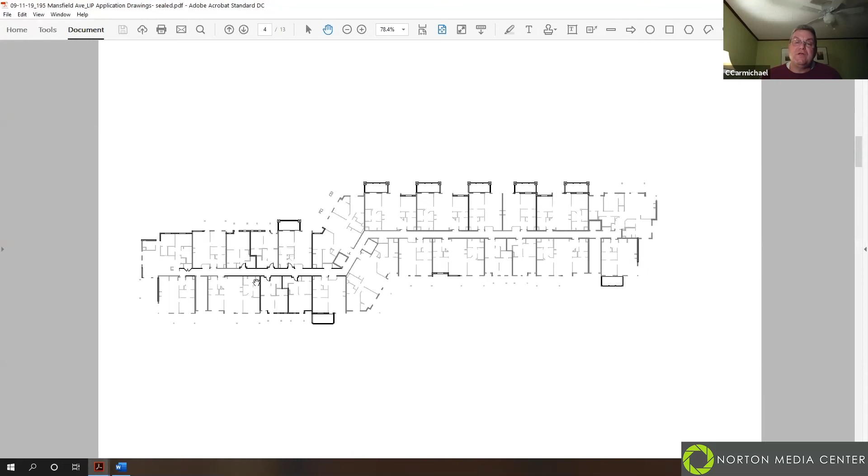So I just wanted you to be aware this is a two-sided building. I don't know what side - is it the southern side that's going to be 5 stories, gentlemen? Yes, that's correct, because the topography of the land is 10 feet higher on the northern side, correct? Correct. I'm just trying to pull that up.

Here you go, this is looking at it from Mansfield Avenue. It's 4 stories on the northern side and 5 stories on the southern side. I want that clearly defined within your waiver request, and I wanted the board to be aware of that. Thank you. If it helps, there was a diagram we shared earlier that I can bring up showing how the height is accomplished.

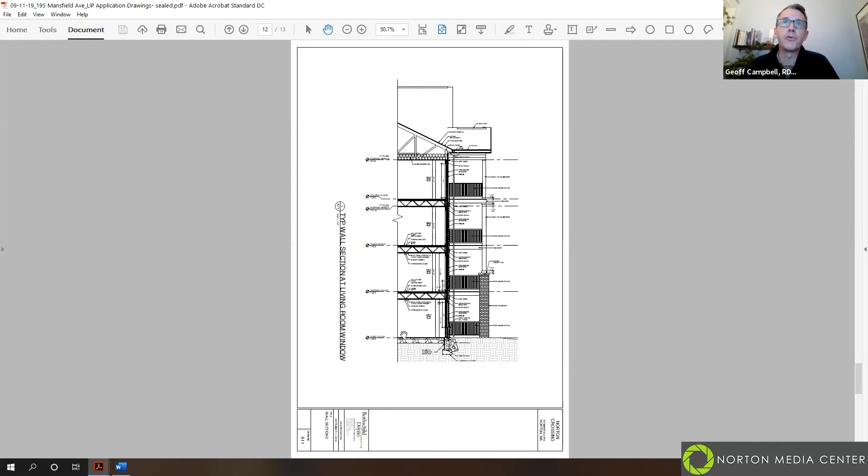One thing I wanted to acknowledge is there's a 45-foot height limit. If we had done a flat roof, it would be 47'6", I believe. But in trying to keep this contextual with the gabled roof, Norton's zoning code actually reads to the very top of the gable rather than the midpoint - that's one reason you see that number at the height it is.

Yeah, we talked about this in the August meeting, exactly this. I remember, but the waiver should be changed to 4 stories on north, 5 stories on south, to be clear. I've made that note, so we'll go over it and clarify it for the next hearing.

And the requested 62.7 - I think what Jeff is saying is that's to the peak, whereas that's not really where you measure to. That's where the Norton zoning code measures it to, the peak. I will say, every local jurisdiction around measures to the midpoint of the gable, which is the typical measurement, but it is technically 62.7. Okay, so it's stated correctly here in the waiver - I was hearing it differently.

Had the applicant considered parking on the ground level or underground, anything like that? Mr. Carmichael was raising that. It strikes me as a whole different design, but was that ever looked at?

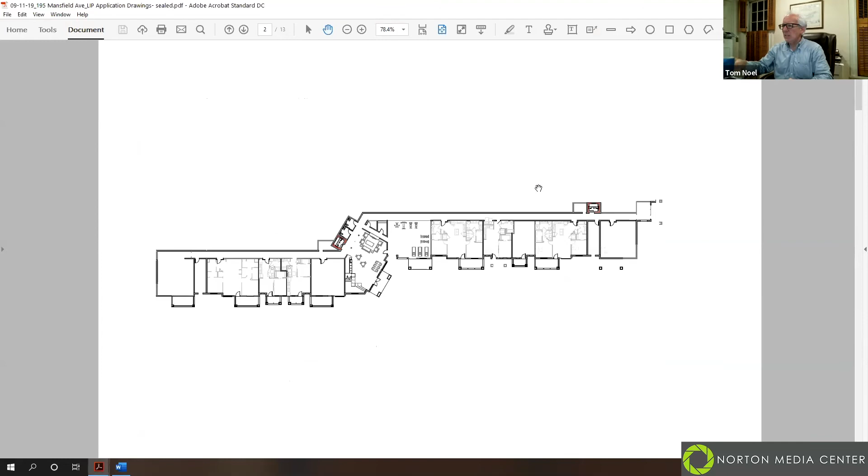Okay, but it would reduce the number of spaces outside the building. It would, yeah. It would also change the number of units we have pretty dramatically. Right now we have that common space in the pool area that's down on the lower floor, so we would not be able to do that. It would be a pretty dramatic change, basically replacing this floor with parking.

I also remember at the other meeting asking if we took off a level, would that bring you into the height requirement? And I remember it saying no, just doing the quick math. I think part of the response was that would also make it uneconomic, or completely change the numbers, and we weren't inclined to suggest that.

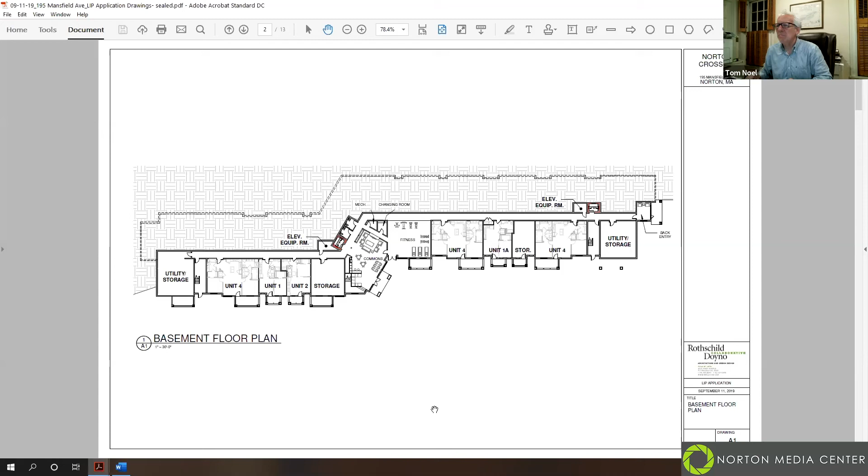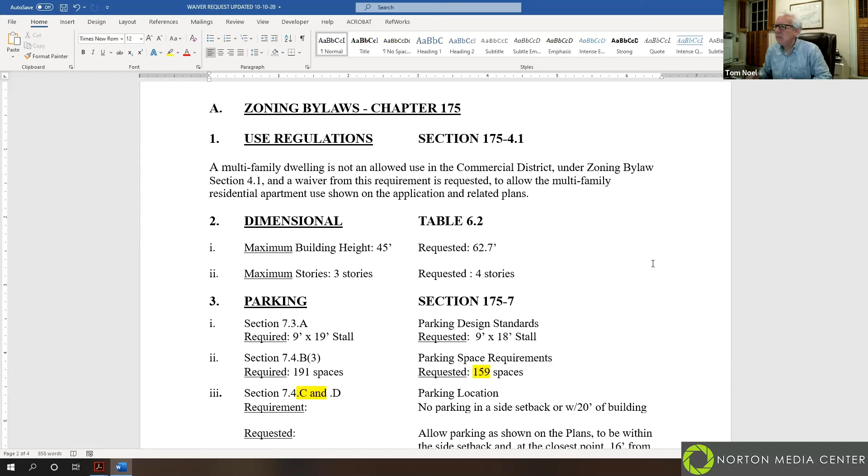But the open discussion is good if anybody has any issues with that. Otherwise, just looking over the rest of the waivers that counsel put together, I think that's all the questions I had. There's some landscaping waivers and the demolition delay. What usually happens and what are you requesting? I just didn't remember seeing this one before.

You have a demolition delay, which is based on the age, and I don't recall exactly what it is. But remember, there is a single family house on the property right now that will have to be demolished. And it is old enough that, if it weren't for a 40B, it would trigger the notice provision. You have to notify the town historical commission, and they can make comments within a certain time period. The first step is they would say whether or not it's historic, and we don't think it's historic in any case. But even if they felt it was historic, what they can ask for is a delay - I don't have my notes, I forget if it's six months. I think it's a year, or it might be a year, to try to work things out with the owner.

So it's a delay, not a permit per se that's needed. It just would otherwise delay the project. I think in this case, the benefits of the housing and the design clearly outweigh any potential value, and we don't have knowledge that it's historic other than by age, which isn't historic - it's just an age thing.

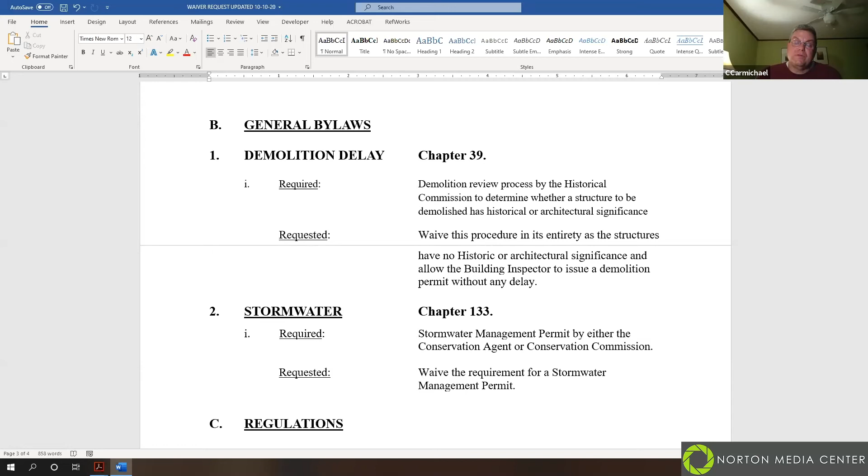And we've checked all the Mass Historic databases and registrations, and this property doesn't show up on any of them - not the Bristol County Registry, not any of them. Okay, so you've done some diligence there. I just didn't know the process, so thank you for explaining.

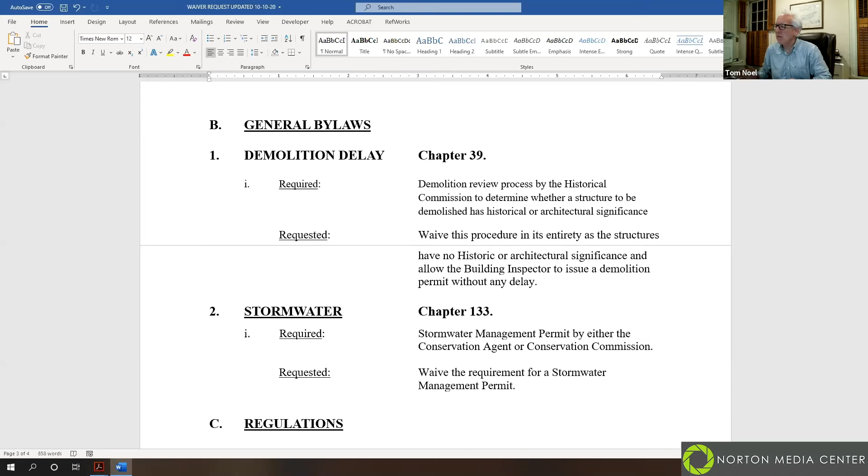If anyone has an issue with it, speak up. Judy? Yeah, I'm just looking at the demolition delay bylaw. I'm just wondering how this - well, whatever, it's better to just leave it as a waiver, but I'm not even sure this project triggers it. Yeah, okay. And the rest, I don't think I had any questions on.

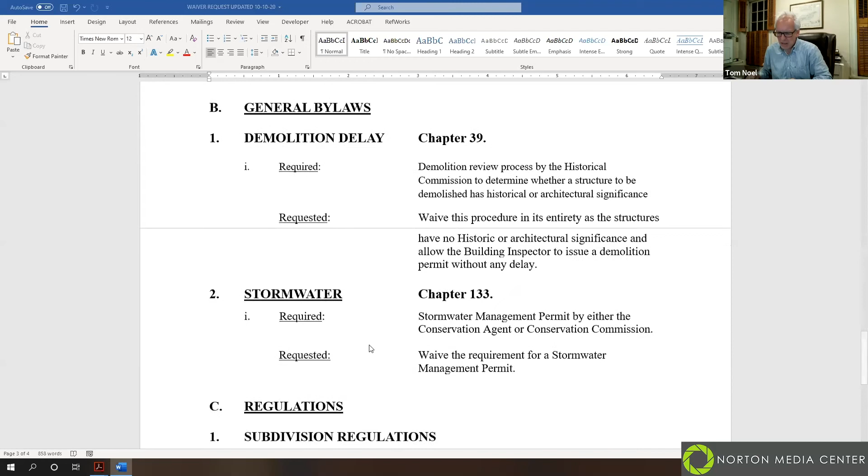Unless other members did, or Judy, or our peer review, Mr. Brennan. But it was good to have the waivers on paper and added to like that. So it sounds like there's going to be another round of some minor changes on paper for us.

Paul's list of issues is helpful, the spreadsheet that he put together. I'll update that for tonight. But it looks like we've addressed these things that are on here, I think. Yeah, so it's good to see the history of what we have addressed, so we don't have to go over everything again. So what are we looking at?

And I'm not closing off the discussion, but are we coming back in 4 weeks with the hope that there might be a... hello?